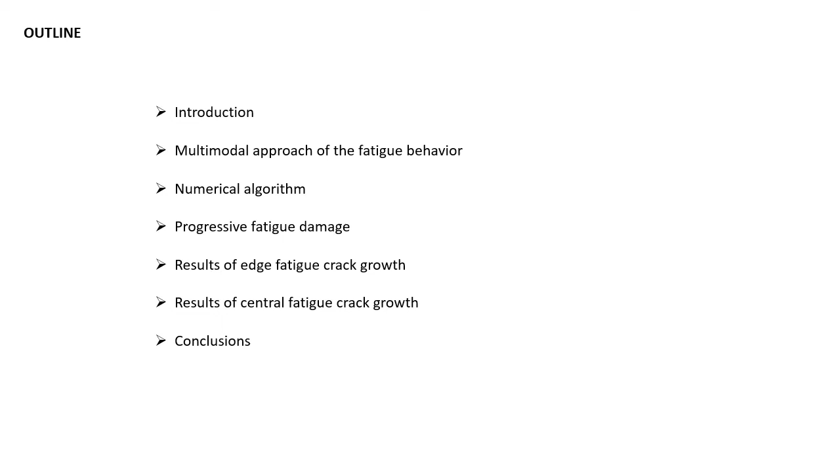The outline of my presentation is following. The key points are results for edge-like and central-like fatigue crack growth modeling. Usually, when we are calculating fatigue life, we use the elastic finite element analysis together with the applied stress field. Based on the calculated strain, we can introduce different models of damage

accumulation. Traditionally, to predict fatigue life of the structure subjected to complex loading, the multi-axial fatigue criteria is used. Nowadays, there are many different fracture criteria that are based on different principles, such as stress or strain-based approaches, and use different ideas. The examples of stress and strain-based criteria are shown on this slide on the right hand.

The basic ideas are usually related to the driving mode of crack opening. For example, the Smith-Watson-Topper or SWT criterion is developed for normal crack opening, while the stress-based Crossland criteria is developed for the shear crack opening or mode 2.

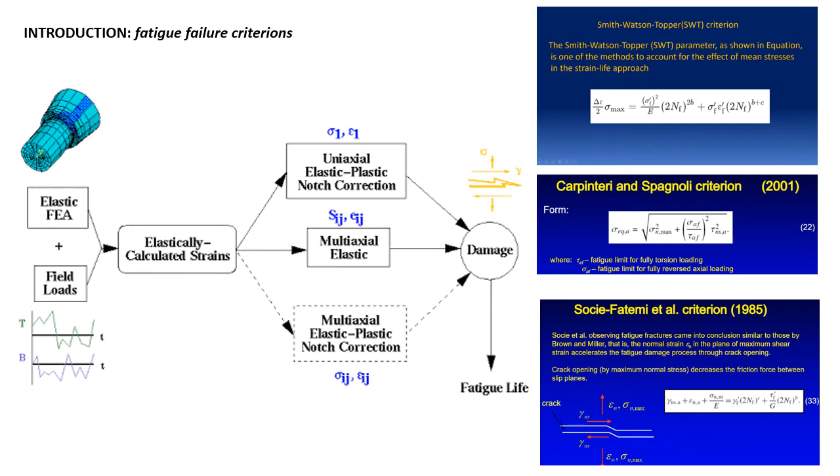Most of such criteria are formulated for a given loading condition only, I mean for low or high cycle fatigue. Some of the criteria are developed so that they can take into account the loading history, but they are mainly not aimed to switch between different loading regimes automatically.

The study on the in-service fatigue failure of different engineering elements shows that fatigue crack often initiated under one loading condition or regime and then turns to the propagation under another one. The most demonstrative example of such behavior is the crack initiation in turbojet engine blades. At the initial stage, it can be provoked by high-frequency vibration leading to the very high cycle fatigue loading.

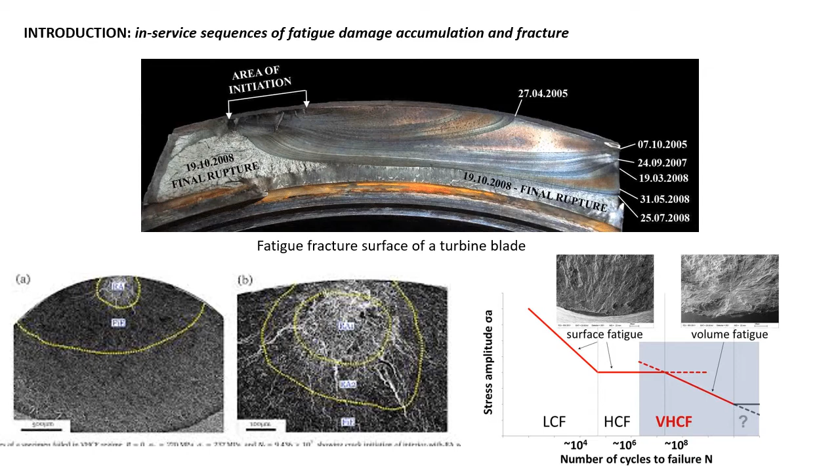Once the crack-like defect appears, the later stage of crack propagation is driven by the high cycle fatigue loading condition. Obviously, the kinetic parameters and therefore the corresponding fatigue life will be different for these stages. This work introduced a multimodal approach and numerical algorithm for calculating the progressive fatigue damage accumulation and failure with respect to the loading mode based on the stress amplitude.

In order to describe a full SN curve, the multimodal approach is used. The main idea is to distinguish three different regimes with its own mechanism and description of the fatigue damage accumulation by individual laws. The change in mechanism is not sharp, that is in good agreement with the physically based research of fracture processes. Between the regimes can be introduced the bifurcation area where two different mechanisms are existing. A specific method of choosing the damage mode in such area should be established.

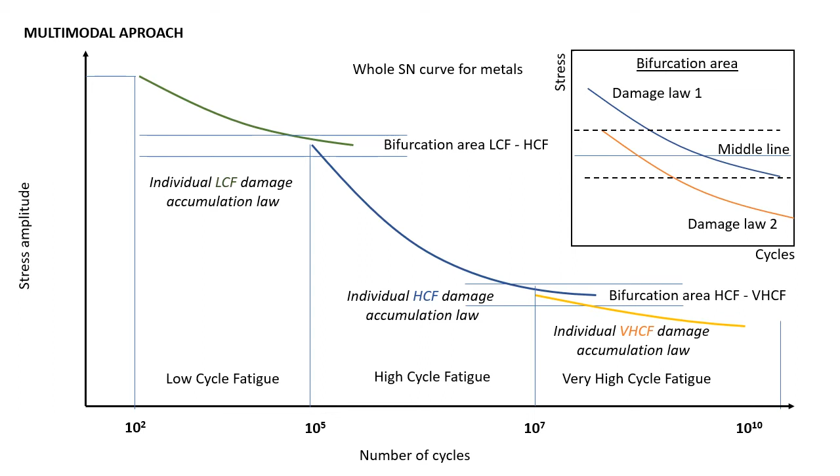In the present work, the uniform relation between stress and number of cycles, like a Basquin-type equation, was used for all three regimes, but the parameters of the curves were determined for each range, low cycle, high cycle, and very high cycle fatigue individually. The two-parameter kinetic model of fatigue damage accumulation was used. The parameters alpha and gamma determine the damage accumulation rate. In order to simplify the analytical solution for the damage function, the following link between these parameters is chosen: alpha equals 1 minus gamma.

In order to describe the evolution of fatigue damage in metal, the following kinetic damage equations were used for the low, high, and very high cycle regions. The associated criteria for the function are presented below based on the SWT criterion. The parameters of the criterion, such as ultimate tensile strength, fatigue endurance in the low, high, and very high cycle fatigue ranges, are taken from the uniaxial tensile and fatigue tests.

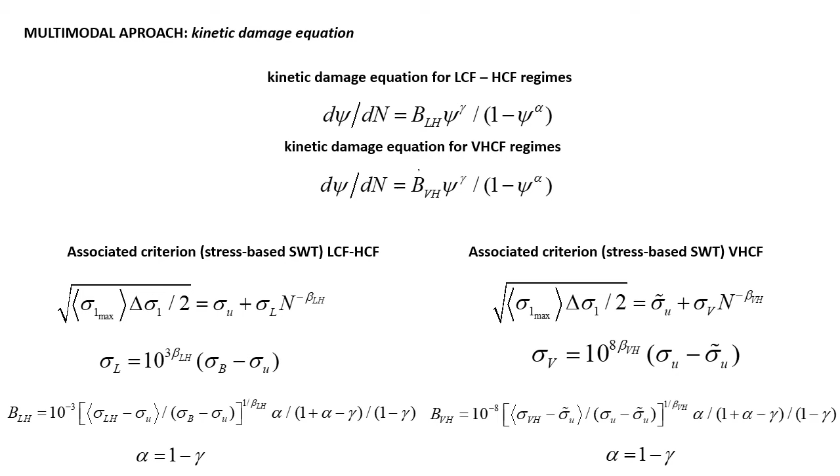The numerical algorithm can be separated into 4 different steps. At the first step, we perform the elastic finite element analysis under given applied stresses. At the second step, we can specify the branch of fatigue life depending on the calculated stress amplitude.

It is important to outline that the local stress can be higher than the applied macroscopic stresses. This can lead to the switch between fatigue curve branches at different stages of numerical calculation. The third step is calculating the damage function for each element and choosing the elements where the value of the damage function is exceeding a given value.

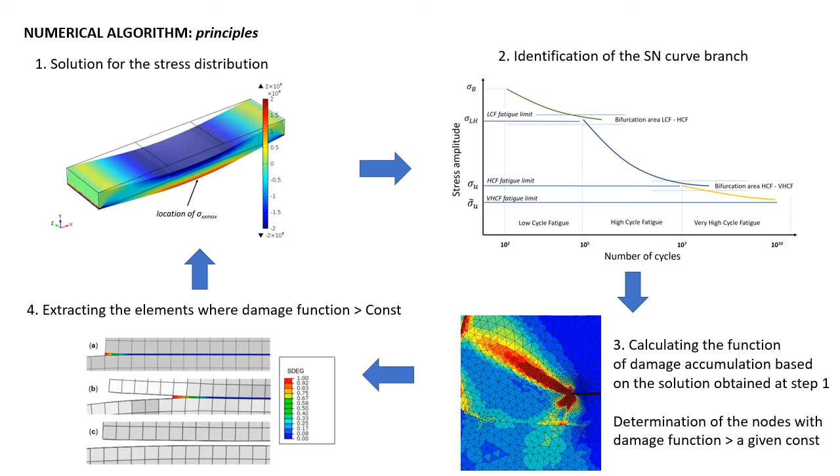At the last step, all elements where the damage function is exceeding the given value are deleted from the numerical model. So this procedure can lead to introducing stress concentration factors to the model. After that, the elastic analysis is repeated again for the numerical model with the deleted elements, and this procedure will be repeated up to the final fracture of the element of structure.

The details of damage function calculation are presented on the slide. The calculation of the function is realized by using a self-developed patch that is integrated in the ANSYS software and uses a calculated stress field by using finite element methods.

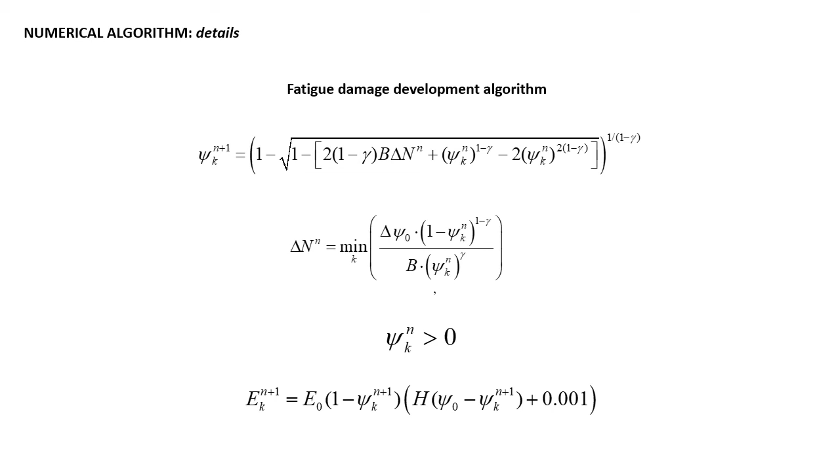After a certain length of crack-like structure, the mechanism was turned to the propagation in the high cycle fatigue region. The total fatigue life was calculated based on 2 steps: the first step of initiation and early growth, and propagation in high cycle fatigue.

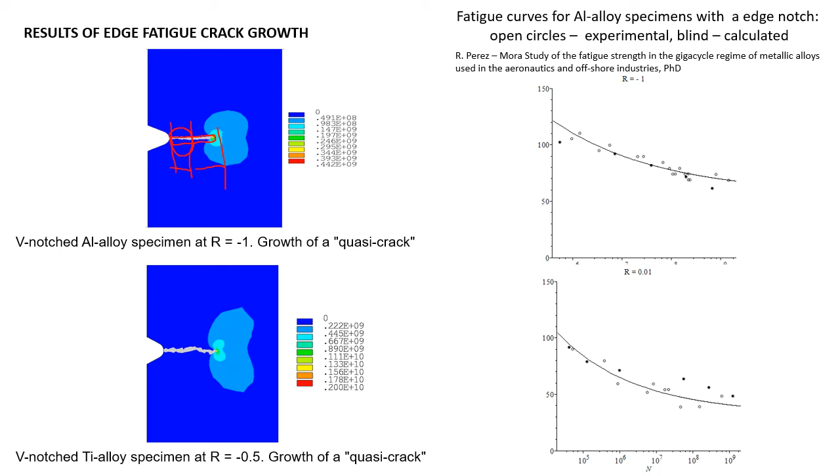The same procedure was realized for another stress ratio, R0.5, and we can see similarly the good match of the experimental and numerical data. The results of damage function calculation for the specimen with a central hole subjected to cyclic loading are

presented on this slide. The experimental data were taken from the paper of Marmi and Duchene, multi-axial fatigue damage modeling at macro scale of titanium alloy. As we can see, the results of numerical simulation and experimental data are in good agreement, similar to the previous case of the edge-notch specimen.

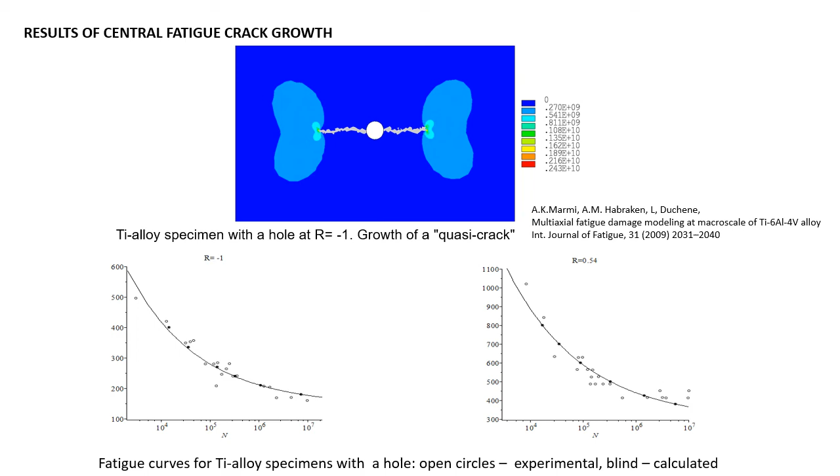Finally, the following conclusions can be stated. The proposed multimodal approach and numerical algorithm was applied to calculate the fatigue life of central crack and edge-notch specimens made from titanium and aluminum alloys. The results of calculation are in good agreement with the experimental data. The proposed model can be applied to predict the crack path together with the fatigue life.

The proposed approach takes into account the loading history, including the switch of the loading regime from low, high to very high cycle fatigue range. The results of calculation show a good agreement with experimental data obtained for both loading parameters, from the stress ratio R-1 to R-0.5. The proposed approach can be applied for different structural materials, from aluminum to quite strong titanium alloys.

And also a uniform numerical method has been developed that allows a thorough calculation of the damage zone development and crack-like defect formation in a material under cyclic loading. The proposed method does not need explicit identification of the crack in the classic sense.